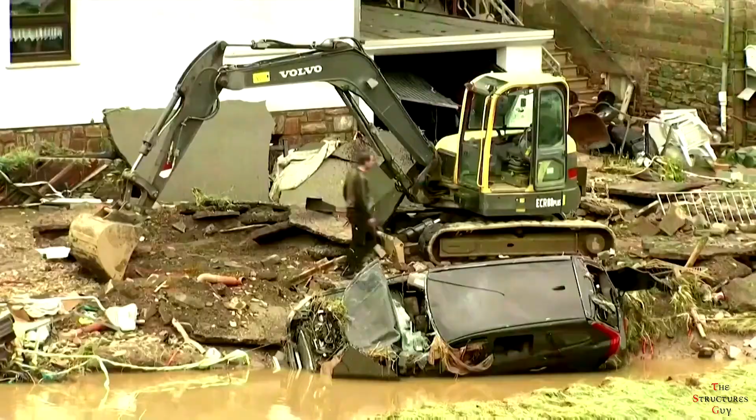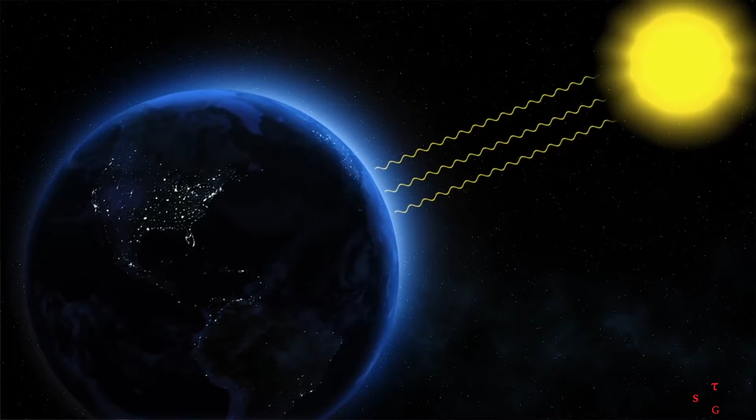Extreme rainfalls like this one are the most visible signs that the climate is warming because of increased greenhouse gas emissions, such that a flood like this has not been seen in about 500 years or even 1,000 years. Studies have revealed that floods are now occurring more often because a warmer atmosphere can hold more moisture, generating more powerful rainfalls and thus worse floods.

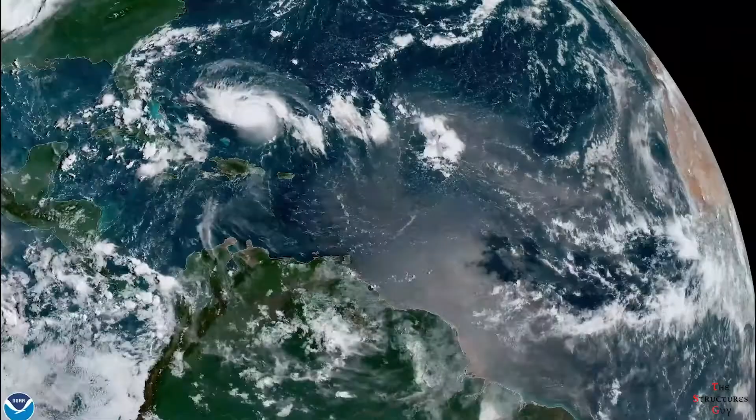However, extreme weather events are becoming increasingly common around the globe, whether they are wildfires, more intense hurricanes, or floods like this one. Thus, engineers must start rethinking their designs to make them more climate-proof, where they can stand the new loading. Climate change has far-reaching effects on all aspects of our daily life.

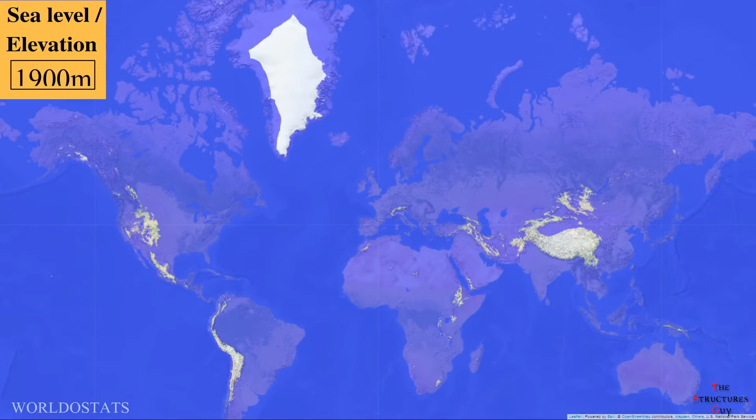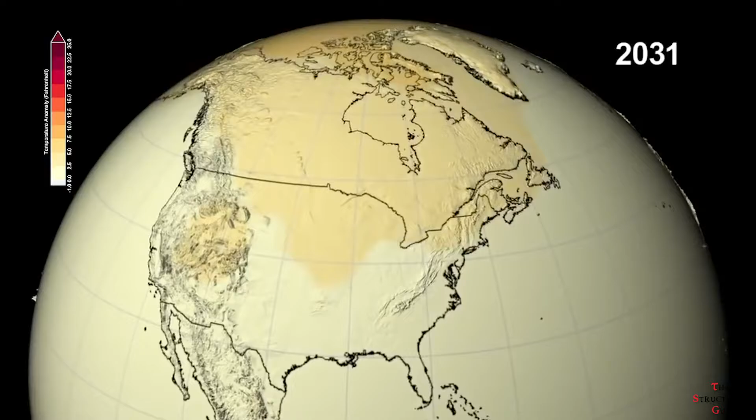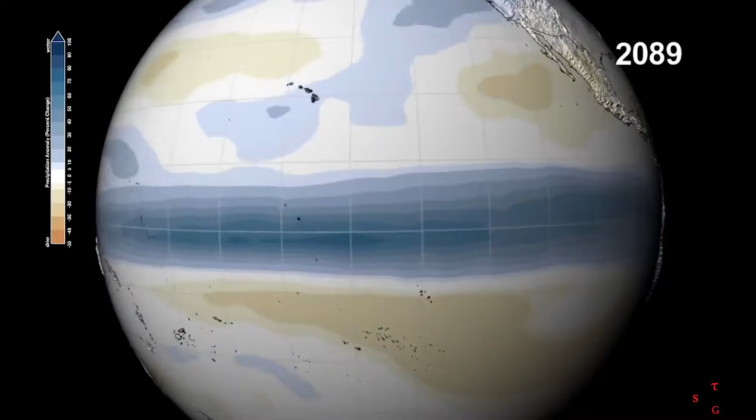While warming and rising sea levels are the most talked about effects, extreme weather conditions also influence the way engineers design buildings. Scientists have revealed a consensus that extreme events of the past will not be representative of those of the future, as climate science is not able to precisely forecast the future. This poses a challenge to structural engineers whose design standards are based on the assumption of a static climate as observed in the past.

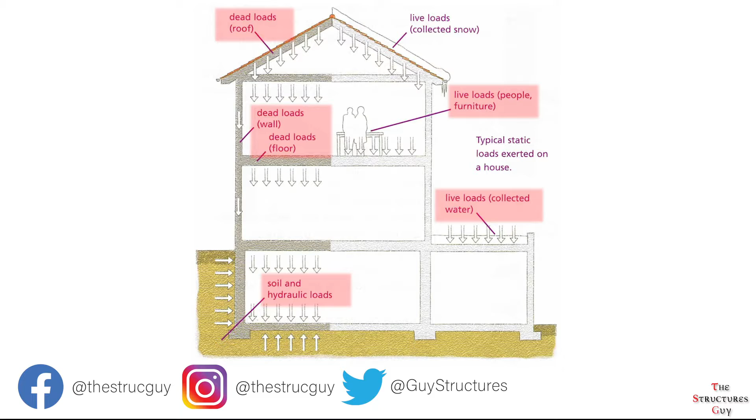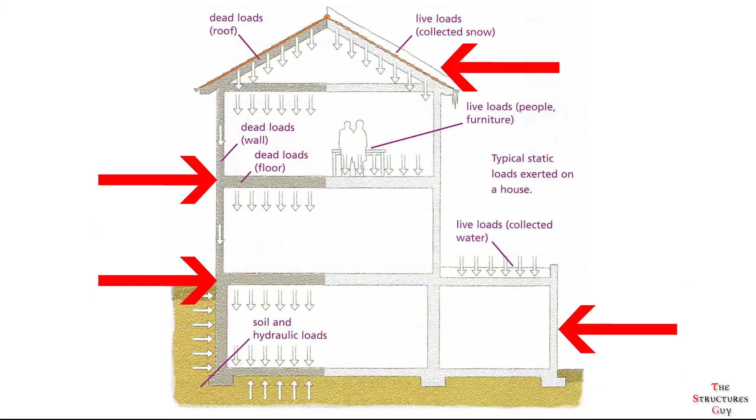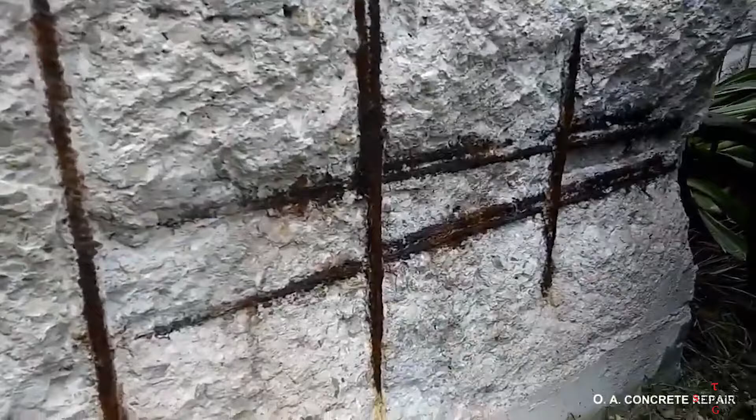Structural engineers don't just consider normal loads like people or furniture into their designs, but they also consider loads like snow, ice, wind, and sometimes rain. These different load conditions affect various aspects of a building's design, from the support structure to materials used in construction. Those loads are purely structural, but changes in temperature can also lead to increased corrosion, decreased strength, and other types of material degradation to existing structures.

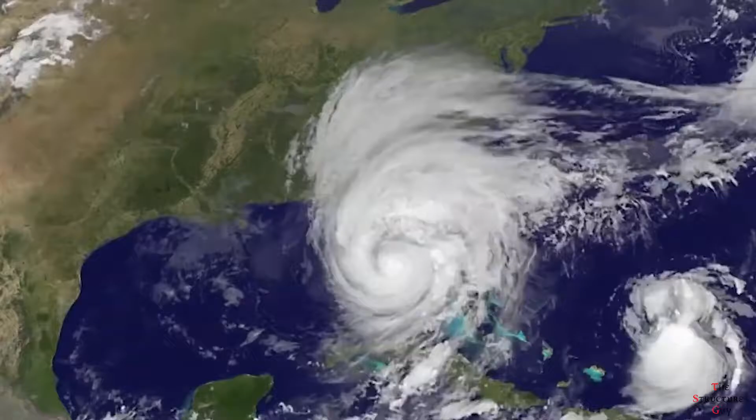As climate change worsens, the initial assumptions engineers use to design structures become invalid, and structures cannot handle the new loads that were unaccounted for during the initial design process. Structural engineering is no longer a matter of making sure the building stands under standard loading conditions, but it is also a game of predicting what extremes the structure may face over its proposed lifetime and designing for these extreme loads.

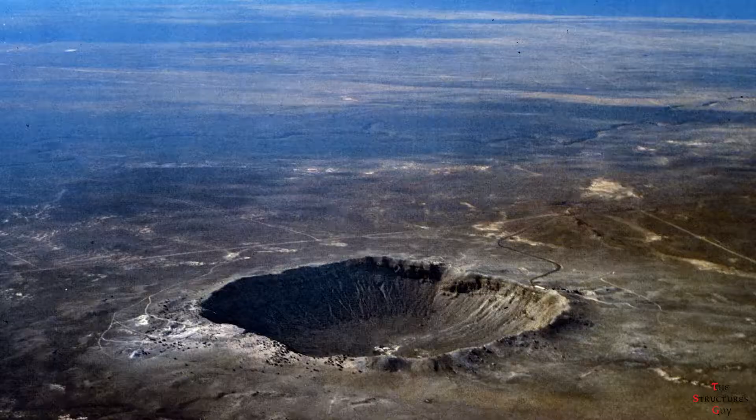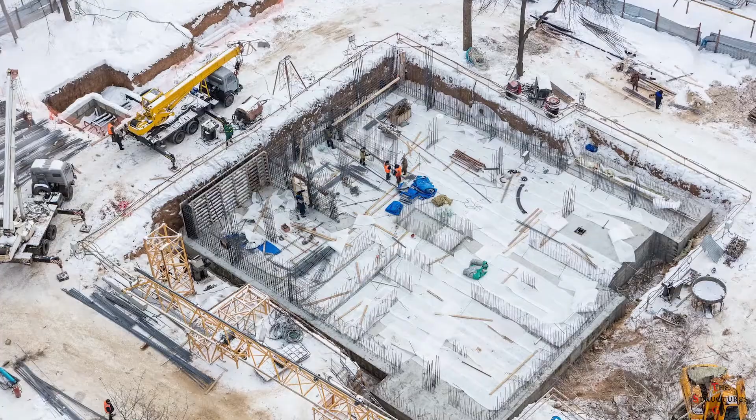There are three possible future impacts of climate change on structures. First, impacts of temperature changes such as drought areas, more frequent freezing-thawing cycles, warming of ocean surfaces resulting in hurricanes and typhoons, thawing of ice reserves resulting in rising sea levels, bigger and abrupt floods, changing of groundwater levels, and heavy abrupt snowfalls.

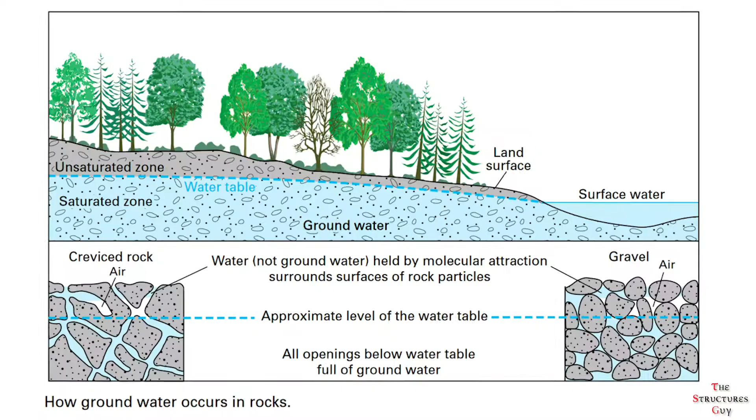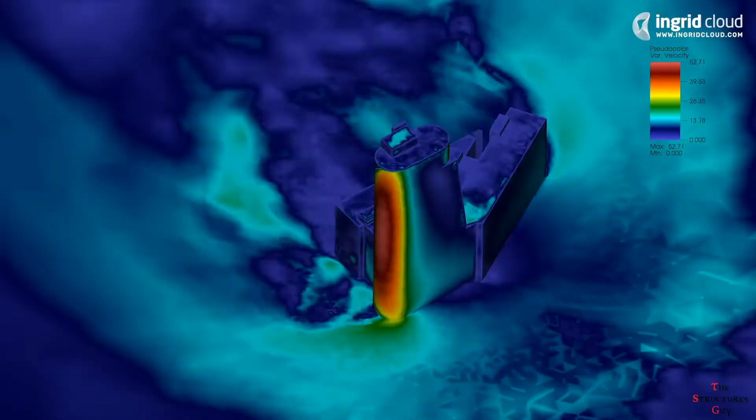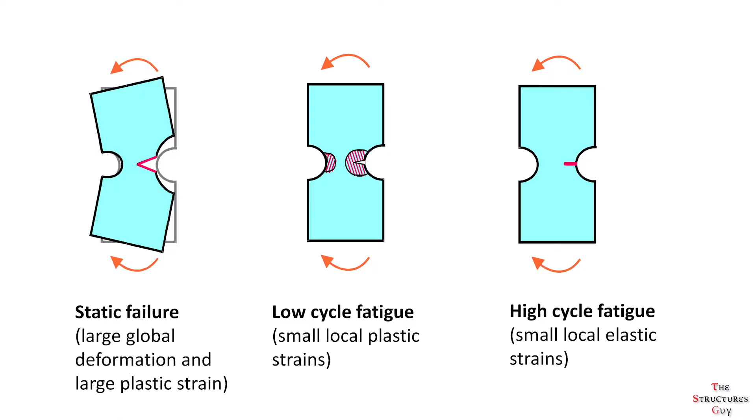Second, impacts of higher wind speeds such as higher wind impulses, increase in wind intensity, and different wind profiles. Third, impacts of driving rain, which is a combination of heavy rain and large wind speeds, which includes deterioration of structural surfaces, low cycle fatigue of structural elements, and accumulation of damages in structures.

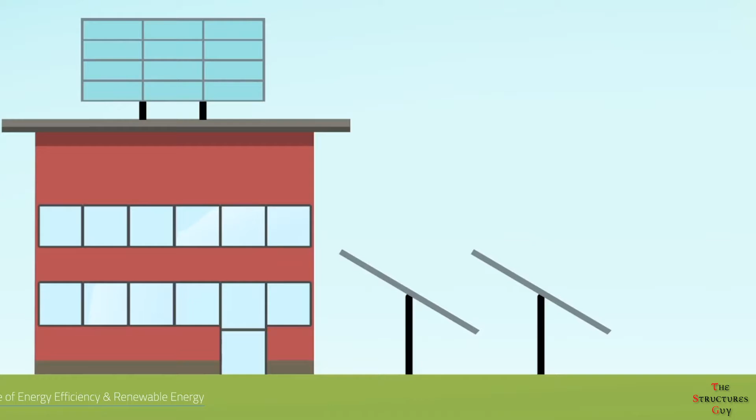A lot of buildings today are designed as green buildings, which is the type of construction that addresses many concerns related to climate and weather change. Notably though, much of green building practice is aimed at mitigating the effects that the construction industry and buildings themselves have on worsening climate change. This means using well-sourced materials, utilizing passive ventilation, and laying out the structure so that environmental conditions can aid in heating and cooling of the internal structure.

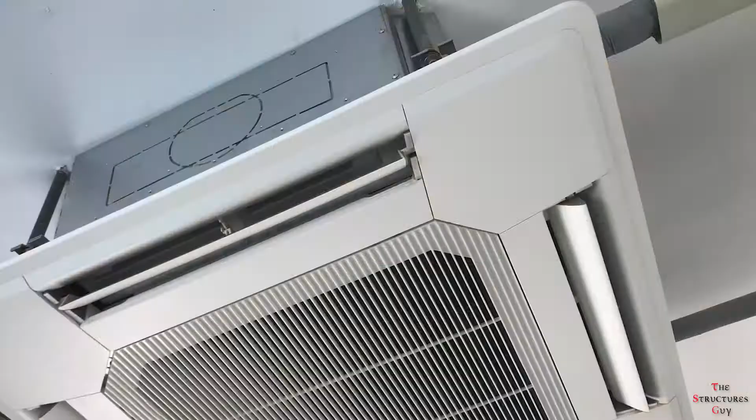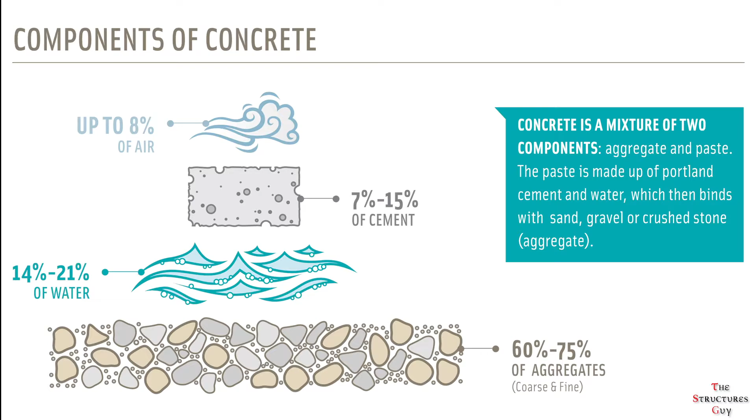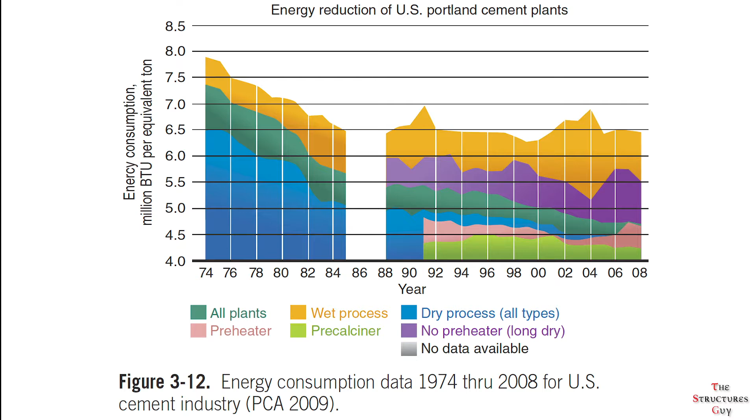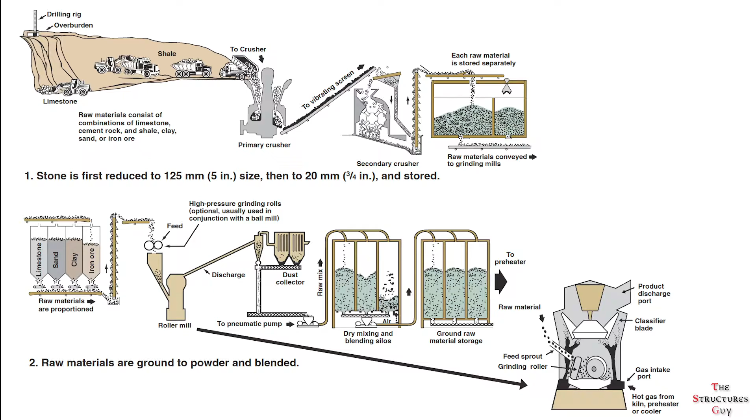Also, we must look at concrete if we want to reduce CO2 emissions, as concrete is the most used man-made material in the world. Concrete is made of cementitious materials, water, and fine and coarse aggregates. Although the cementitious materials make up the smallest portion of the concrete mix design, they contribute approximately 90% of its carbon footprint when using ordinary Portland cement. This high contribution is attributed to both the energy used in manufacturing Portland cement and the chemical reaction associated with converting limestone to cement.

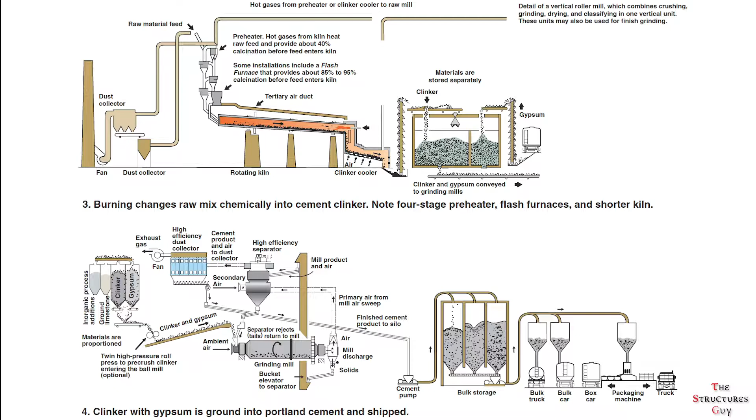Other cementitious materials such as slag cement and fly ash are commonly used and significantly reduce the carbon footprint of concrete.

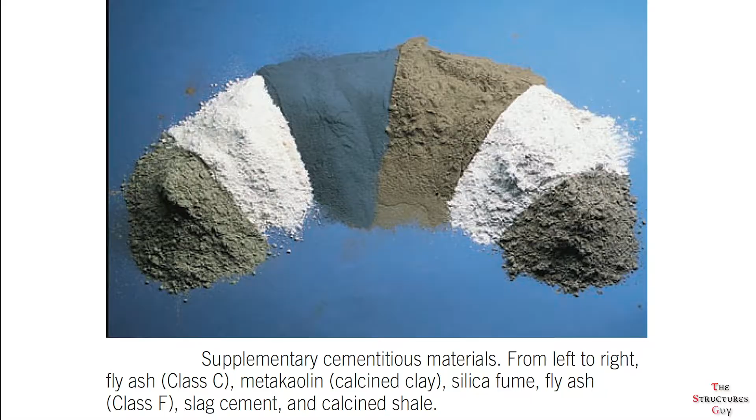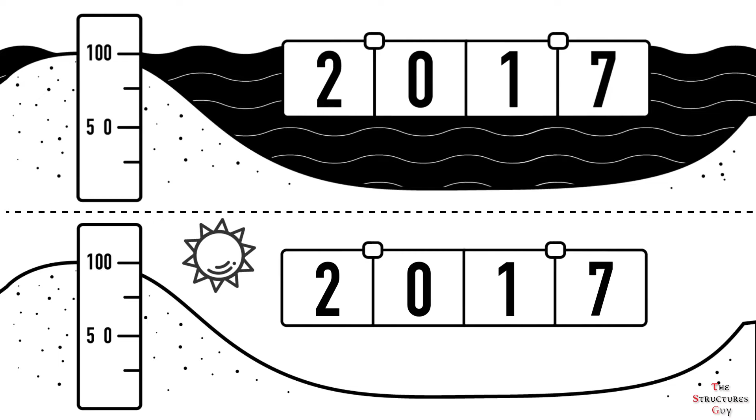When engineers are going through calculations for different weather-dependent loading conditions like wind, rain, and snow, they often design based on conditions suited for 50-year or 100-year storms. This does not mean that storms happen once every 50 or 100 years, but refers to the possibility or probability of these storms happening in each interval. In fact, they can happen more frequently, and indeed they do, thanks to climate change.

Designing for a 50-year or 100-year storm can mean significantly increased costs in building design and construction phases. Engineers are now faced with changing loading conditions due to climate change and are being forced to take a more conservative approach in their processes, designing for higher loads than what standards specify, simply because it is very likely that climate change will soon change what those standard design loads are.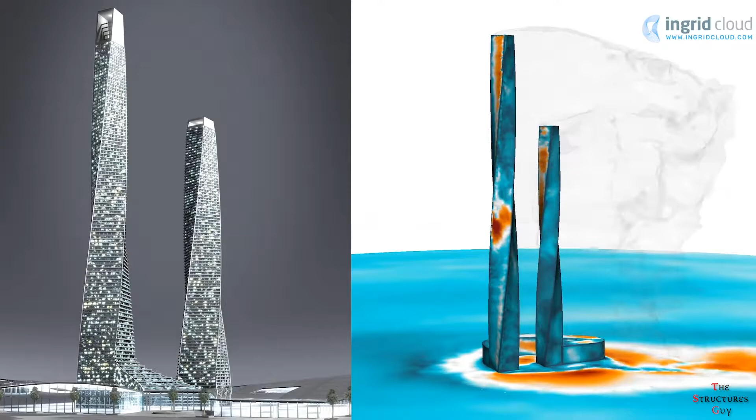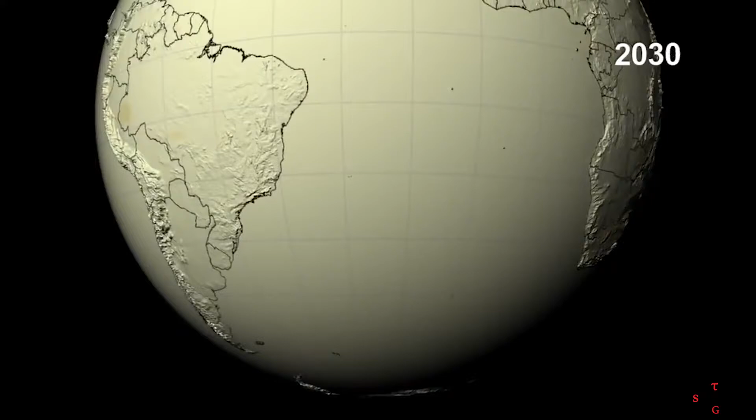When you understand the full scope of a structural engineer's job and how design is dependent upon the loading conditions of a structure, you can understand how climate change will likely transform the current building design process. Engineers can join in research with climate scientists to develop integrated models for extreme events, which combined with observations can give probabilistic guidance for the conditions for which a structure should be designed, constructed, operated, and maintained.

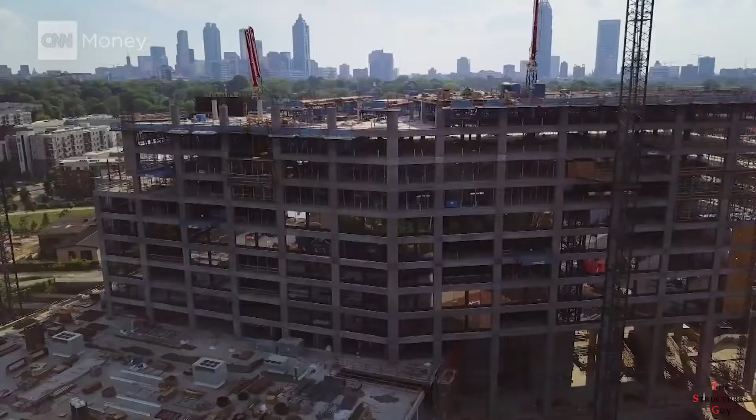We've only mentioned a few different aspects of how climate change will change structural engineering. However, engineers also must consider frequent fires in their design, which causes them to rethink the choice of materials, shifting to less flammable supplies. As you can see, there are many aspects that structural engineers have to consider when it comes to how their designs will change due to climate change.